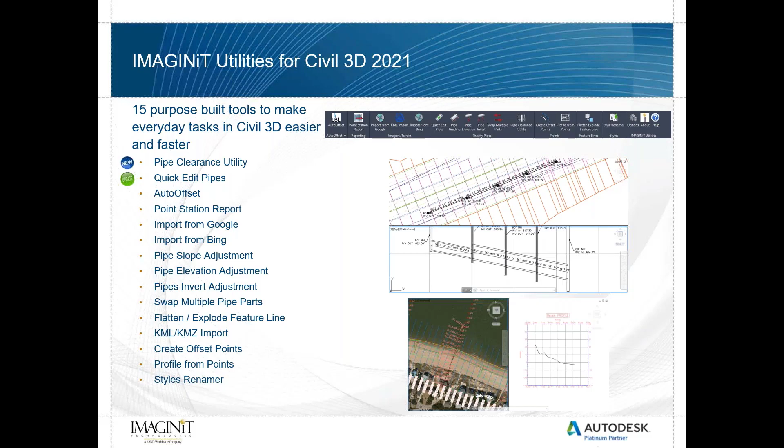But as you can see, we're amassing quite a list. And absolutely the most popular ones are the Google tools. They've been around ever since Autodesk did away with the Google tools inside of Civil 3D. But the piping tools are in a very solid second place. So those are the ones that we really chose to focus on this year. We'll talk about what we've added, because this is what's new, and then I'm going to highlight each of the other utilities, and then we are going to show as much as we can live.

With the gravity pipe utilities, we added one brand new tool, a pipe clearance utility is what we're calling it. Really what it allows us to do is label the distance in between pipes that cross. Autodesk has had a tool for interference detection for quite some time inside of Civil 3D, but other than telling you whether it clashes or not, that's about all you can do with it. So we wanted to figure out what's the distance between these pipes, and that's what we created.

Then we updated a previous tool. Quick Edit Pipes is, of all the piping utilities, the most popular. It's the one that's used the most. But Quick Edit Pipes was also the only utility that would only work in plan view. All the other ones allow you to select structures or pipes in plan or profile view. So we went back to work on that utility. We did make some other under the hood updates that I think will make it work a whole lot better, especially for drawings in metric units. But Quick Edit Pipes, I'm very happy to announce, now works in a profile view as well.

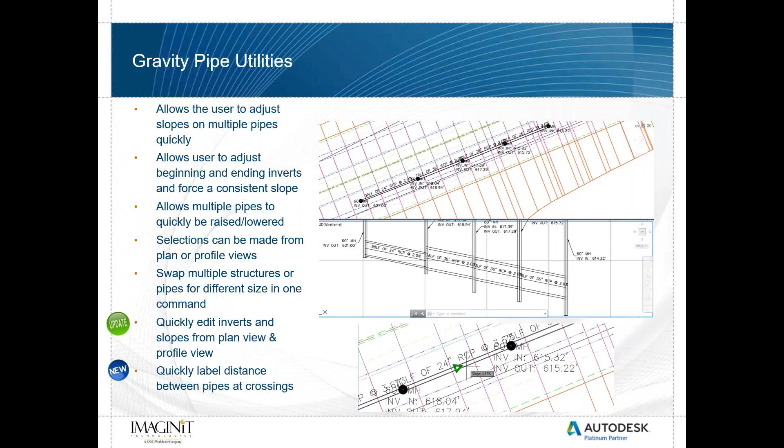Auto offset was our very first utility. It is somewhat purpose-built to help annotate topographic surveys. So for anyone that has to annotate strip topo, maybe between a right-of-way, labeled by station and offset, and maybe some point elevations and what it is, this utility is definitely for you. Make sure you check that out. The labels are Civil 3D objects, so should that alignment change, all of that annotation is going to change and update with it.

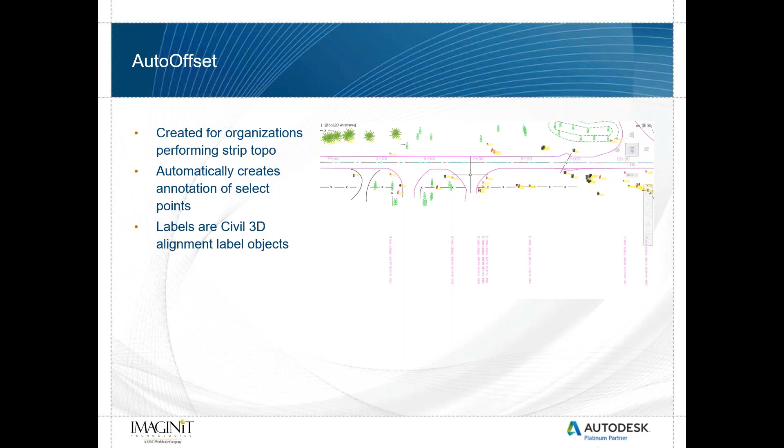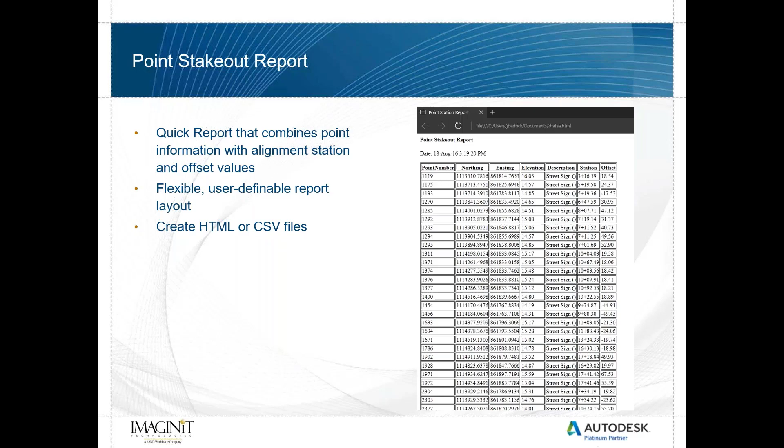We've got a utility for basically creating a report of point information combined with alignment information. For a long time, people have wanted to be able to have both of these together. Basically give me point number, northing and easting, elevation, description, but also tell me the station and offset. And that's a little bit difficult to do with Civil 3D right now, because it's a combination of a couple of different reports, and having to splice that information together is just a little bit harder than it needed to be. So there is a utility for that.

By far, our most popular utility is import from Google. And I'm just going to say import from Google, import from Bing, because at this point, these utilities work identically. The only difference between them is the data source.

So if you recall, way back in Civil 3D 2012, that was the last year that there was Google Earth integration with Civil 3D. And the way that worked was, number one, you had to have Google Earth installed, and you zoomed in from Google Earth to the area that you cared about, and then there was a routine where you flipped over to Civil 3D and said, import from Google Earth, and whatever was on the screen in Google Earth, it kind of sucked it into Civil 3D. It also had the ability to bring in terrain information. Well, that unfortunately went away. We had to do without for a year, and then IMAGINiT created this particular utility.

And ours is a little bit different in that we use the Google Maps API. So really that's just geek speak for, we're using the exact same imagery that you find on your phone. If anybody goes to Google Maps on their phone, we're using the same mechanism for this. There is a point where Google limits us to the resolution of imagery that they'll serve, but for really nice zoomed in areas, this works great. Another benefit of this tool is you don't have to have anything else installed on your system. So you don't have to have Google Earth installed at all.

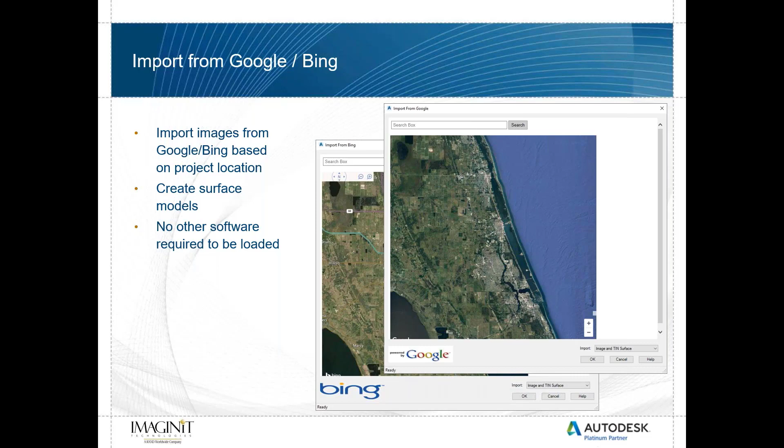We also give you an option to bring in surface information. Again, very similar to how that worked with Google Earth, but once Autodesk did away with that, they've never brought that mechanism back in any shape, manner, or form. So our utility is a little bit unique in that matter.

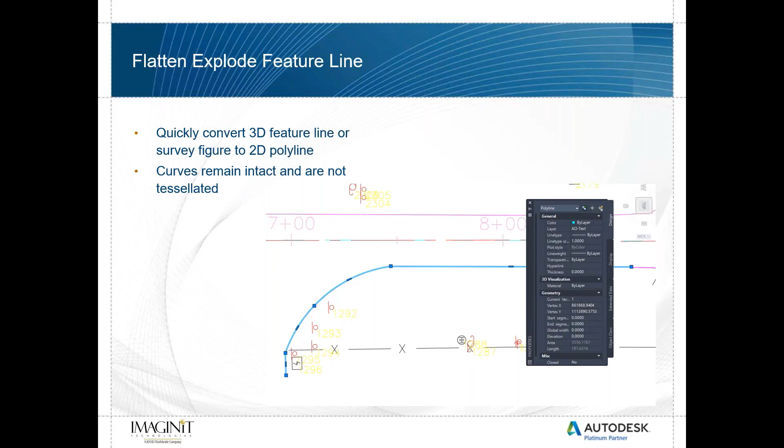We've got a couple of, I'm just going to call them somewhat survey-focused utilities. One of them is one that we call Flatten Explode feature lines. If you have ever exploded a feature line, what happens in curves is it tessellates, or put another way, you get short line segments that approximate that curve. And this is what we wanted to do away with. We wanted an exact 2D polyline of the three-dimensional shape. So that's what our utility does. No curve tessellation at all. Curves remain intact.

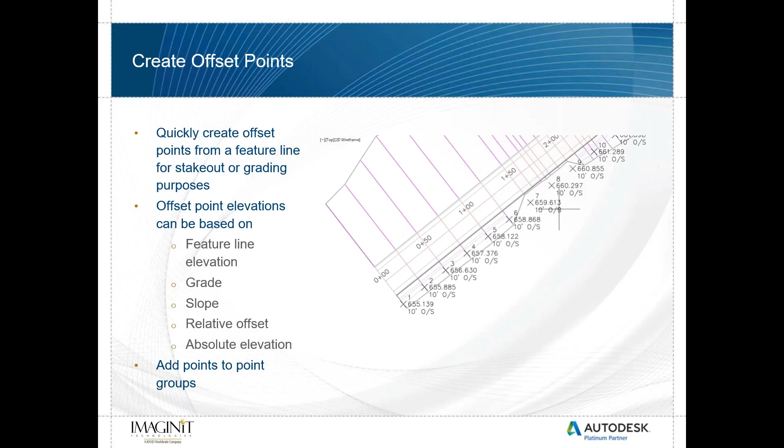Creating offset points. One of the things that we heard, especially from surveyors, is that it was really difficult just to create stakeouts from basically corridor based information. Back in the day, we would work with clients and advise them to use mark points inside of the corridor assembly, and it worked well, but that's really involved. Then it's just, I want to create points offset X distance from this particular feature line, go. And that's what this utility does.

Being able to generate profiles directly from points. This is something, again, that was driven by some surveyors that we worked with. Imagine you go out and maybe you're shooting topo along a particular ditch line, and all you want to do is see a profile of that ditch or whatever feature you're locating. If you think about what you have to do to get to a profile, first you have to have a surface, right? Then you've got to create an alignment, sample it, plot it, all of that just to see a profile.

So we wanted to come up with an easier way. We think we've done it. We allow you to select points by some method, whether you're picking them from the screen or from a point group or windowing them in, and then pick where you want the profile view to go, and we take care of all the stuff in the background. We're still creating alignments and things like that. We just make it somewhat transparent to the user.

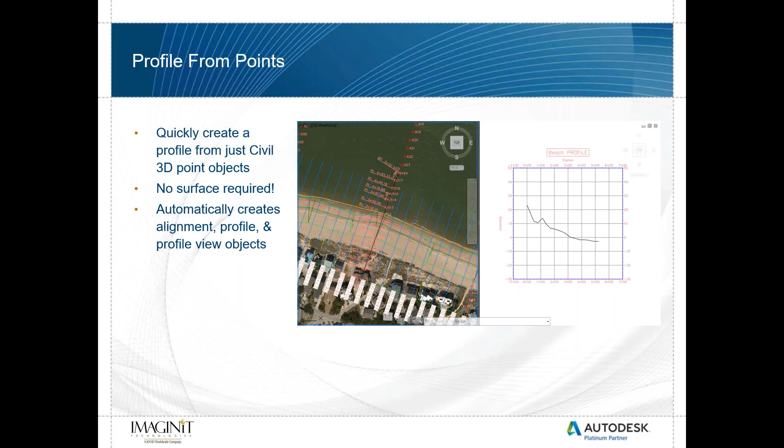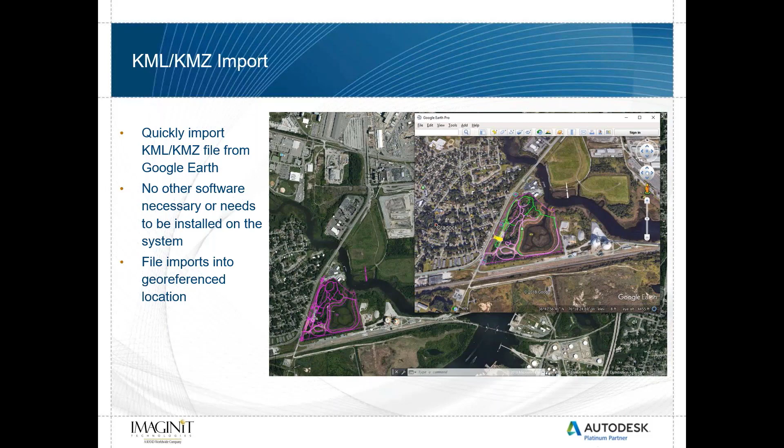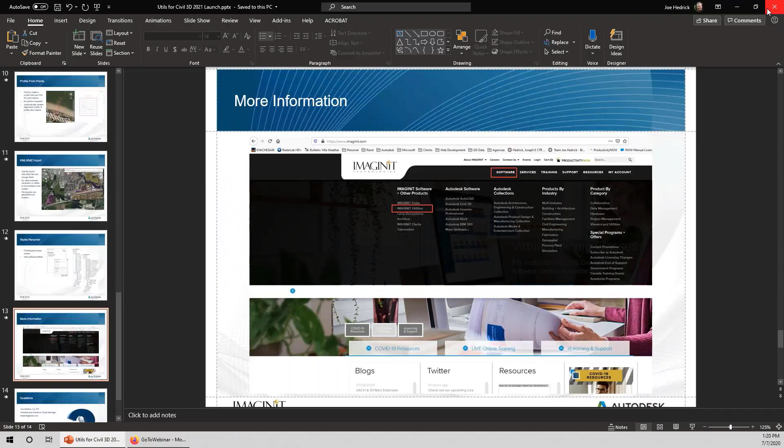So that being said, let's get into the presentation here. I'm going to start with the brand new stuff as I switch drawings here. There we go. If you've seen me present before, you've seen this drawing before, and that's okay. I like to use this drawing to show off some of the utilities because it's clean and you can really see what's going on. When our utilities load, once you install and activate them, you'll get an IMAGINiT ribbon.

Honestly, as far as installation goes, as long as you install the utilities when you've got Civil 3D closed, when you open it up the next time, these things should just appear. So we've tried to make installation as seamless as possible here.

But we'll get the IMAGINiT ribbon. This contains all of the tools, and for the piping ones, they are pretty much dead center in the middle of them, grouped within their own panel. And you'll see the quick edit pipes, and then grading and elevations and swapping parts. But quick edit is the one that we updated, and the pipe clearance utility is the one that is the brand new one.

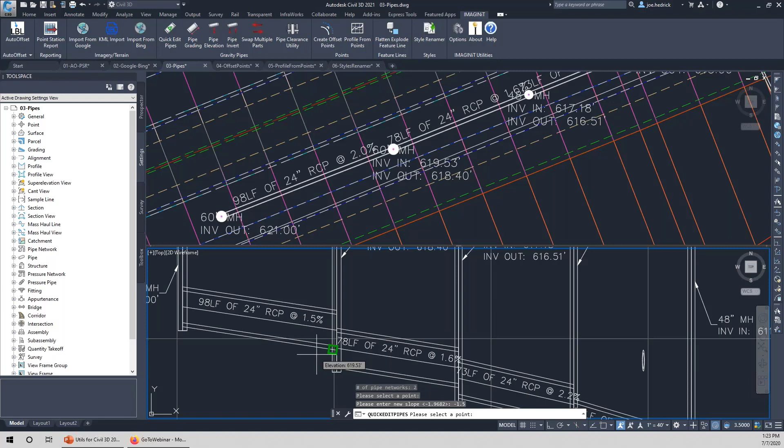That is a setting that's somewhat hidden, but if you go into the options under pipe tool options, here's the end type. And here's where you select what you want to modify. We do default to invert, but if you want to change this to something else and adjust crowns or center lines, you can do that, and the little glyph location will adjust accordingly.

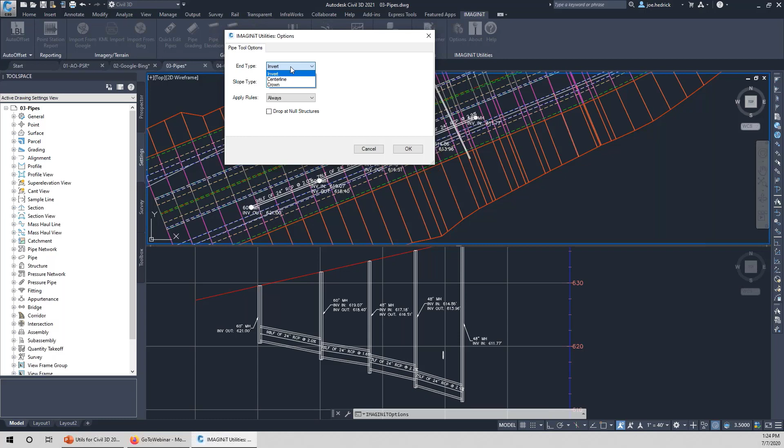But maybe we wanted to, let's see, make this, I don't know, negative 3%. Just like that, we can see that that pipe updates. Maybe this one I want to make negative 2%, and vice versa. The pipes all update accordingly. So hopefully everybody will like that addition is kind of the better word for it.

And once I close the command, everything updates, and you'll see that the labels up in plan view as well as profile view made that change, right? It's not until you actually exit that command do we write it back to the drawing database.

Some of the other tools that were in here as far as just pipe modifications, we do have one that we call pipe grading, which basically allows us to pick one part. And at this point, I'm going to basically pick structures, and it's going to ask me for a starting elevation. So we'll keep it at 621.

And then it's going to ask me for a new grade. And this is a grade that we're going to push through the entire run. So if I wanted to make all of these minus 2%, I could do that. I can, if I want to, enter a pipe drop at each structure.

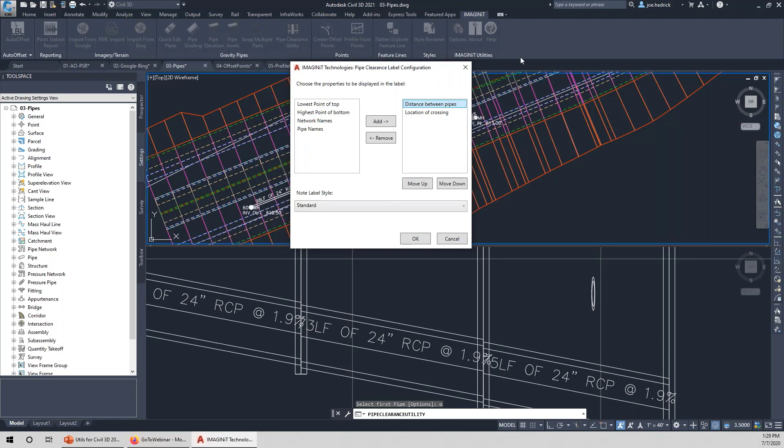But there's other things that we can pull. We can pull the pipe names if you want to. You can pull the network names, what networks they belong to, as well as coordinates for the lowest point of the pipe on top and the highest point of the pipe on the bottom. So again, think about crossing information here. Those are the options, at least for now, to be able to select.

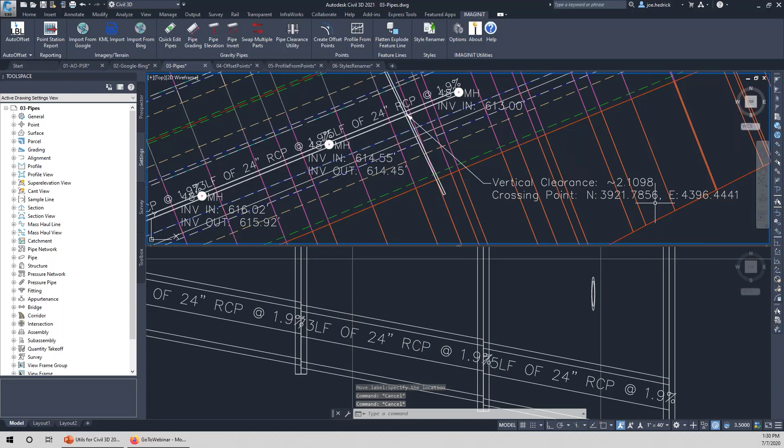And from here, we're just going to ask you to pick pipe 1 and pick pipe 2. So I'm going to pick this first pipe, and then I'll pick the second pipe. And you'll see we just slam a label right at the crossing location, but we'll be able to drag that off, and we can see that the vertical clearance is approximately 2.1 feet. Now, I'm going to go ahead and bring up the precisions right now, and I realize that that's probably a little much.

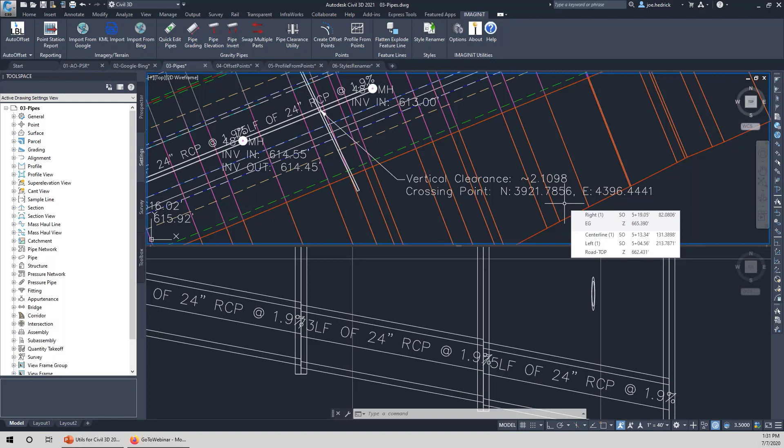So what we are doing for precisions, in an effort not to, I'm going to use the word, junk up that options dialog box, like some of our other utilities, we look at the ambient settings in the drawing and pull the precision information from the ambient settings.

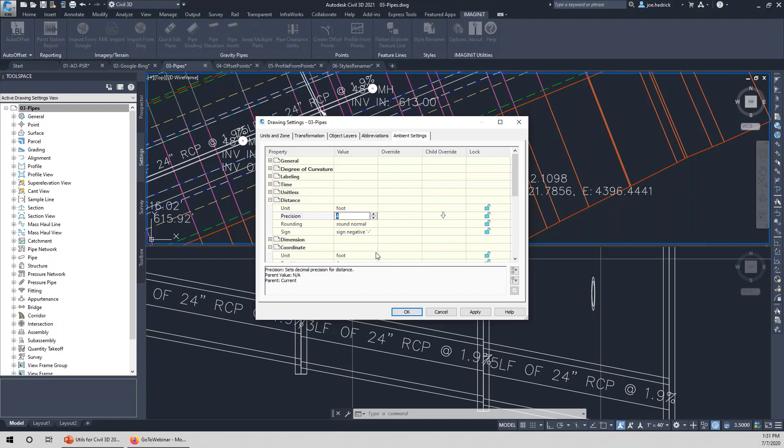So what that means is if we right click and go to edit drawing settings, we'll wait for that to pop up here, and we come over to ambient settings. So if we are looking at the coordinate value for this information. For the crossing, we are looking at the distance value. So just know that that's where you go to make those changes if you don't want to show to this degree. The other thing to note, should any of these pipes move, you'll need to rerun the utility to update the values.

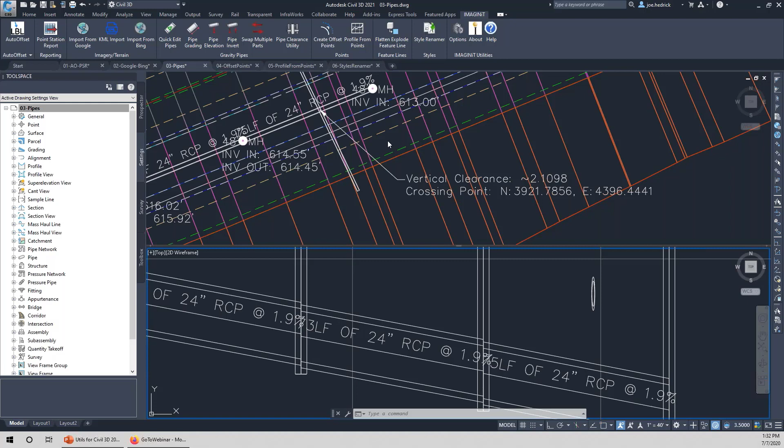So those are the new commands. I hope everybody's excited about those. I want to make sure to save time for some questions. So I'm just going to kind of cherry pick and hit the highlights of a couple of other commands. But we'll look at the Google commands here for just a second.

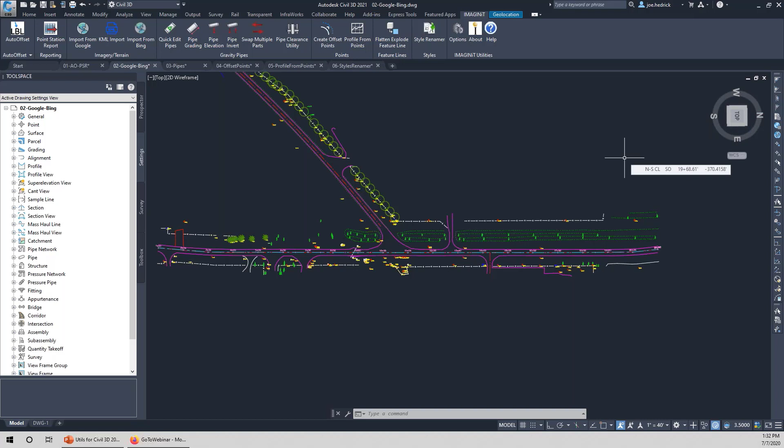This particular drawing is geo-referenced. It's in Florida. And if you'll notice, there's a view twist that's been applied to this drawing. So north is not even straight up. If you look over in the upper right-hand corner of the drawing at the little view cube, you can see that north is pretty much to the right. But when it comes to the Google commands, just to the left of the piping commands, you'll see import from Google.

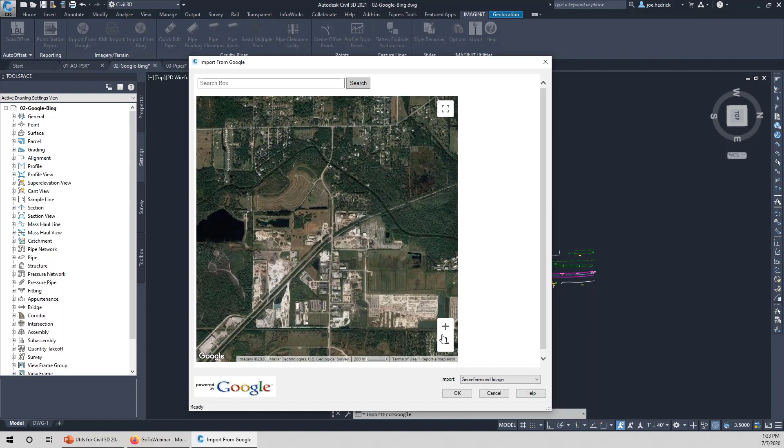When we select that, we get a dialog box that opens, and I will tell you that the center of my drawing canvas is the center of this box. So there's no reason to start panning around inside of this box. There's really no reason to search for an address or a location unless what you're starting with isn't georeferenced. But what you may want to do is just use the zoom tools and zoom in or zoom out. That looks good to me.

And we get a couple of options. Three different commands here. Georeferenced image will do just that. It will import just the image into the drawing. Tin surface is just that. It's going to ask a couple of other questions for essentially X and Y intervals, but it's just going to bring the surface in. And image and tin is the combination of the aforementioned two.

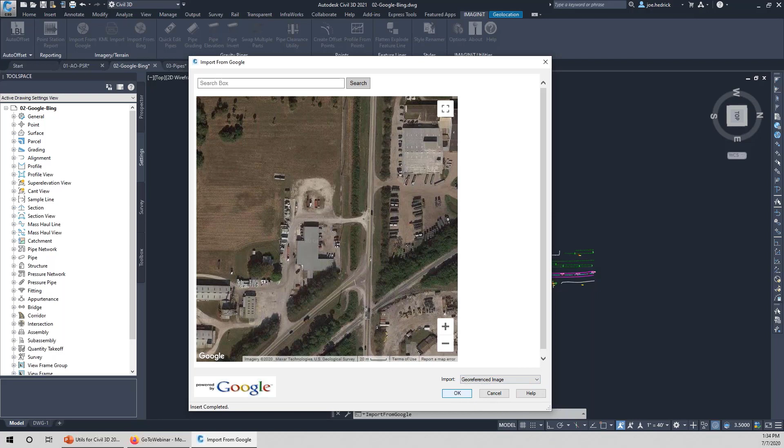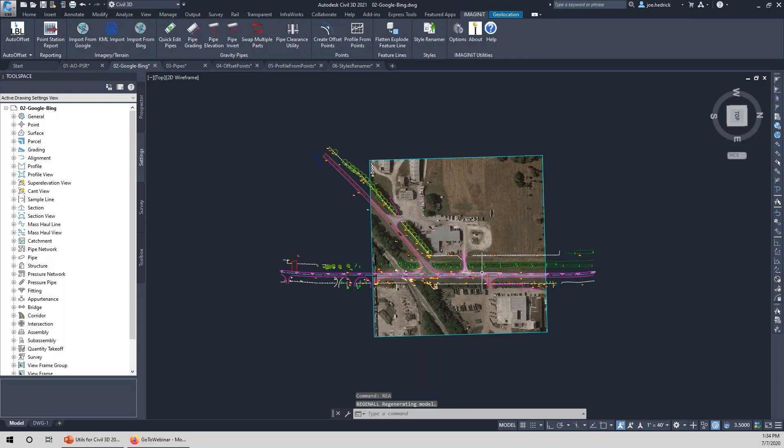So for right now, I'm just going to say georeference image, and just like that, if we do a refresh, we do take care of putting it behind all of the other geometry. If we zoom in and take a peek, it's definitely not bad imagery here. Let's see other things. So we are saving a PNG file. We are throwing it into the same directory as the drawing lives. So that's where you will find those.

Going back and running it one more time just to kind of show you the terrain import features and functions. We'll zoom in there and we'll tell it a terrain surface. And when we hit OK here, it's going to ask for some options, and it's basically asking for X and Y intervals, right? So a lot of this is essentially like USGS based information. So we all know those terrain maps.

I mean, they're good to get kind of a rough idea of what flow conditions might be like on a surface. You're probably not going to want to do a real huge detailed design based on them. However, for maybe pre-watershed analysis, pre-development analysis, it might be great for that. So keep in mind the data that you're using when you pick these intervals, right? We're going to tell you how many points that we're going to bring in.

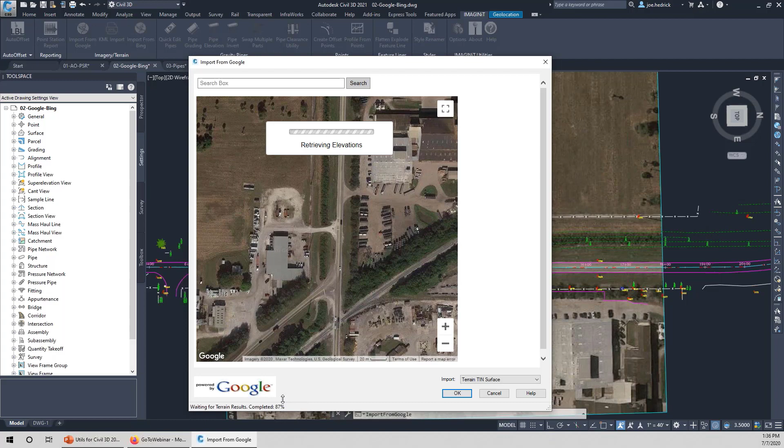So because we're getting a little short on time, I'm actually going to maybe say 75 foot intervals just to reduce the number of points here. And when we hit go, again, we are waiting on Google to return that information to us. Down in the bottom, we can see how fast it's working and going. So it's 87%. So it's almost done.

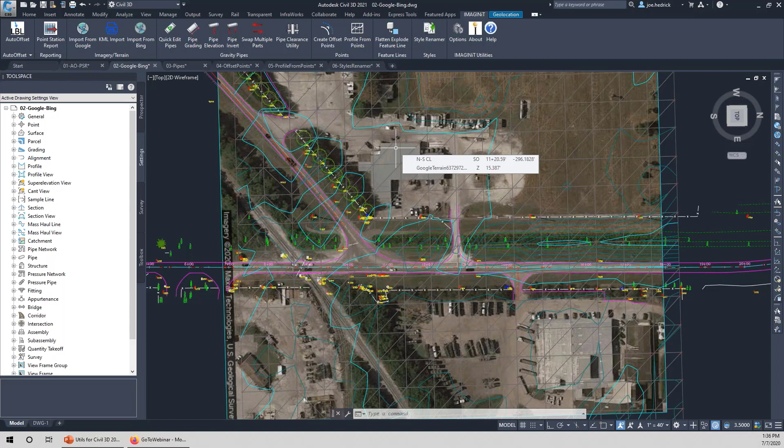And when it is done, what we do is we take that information, we throw it into a surface, we display that surface using whatever default surface style is selected for that drawing. At this point, it's just a surface, and you can do with this really whatever you want. It's a Civil 3D surface. You can stylize it really however you like.